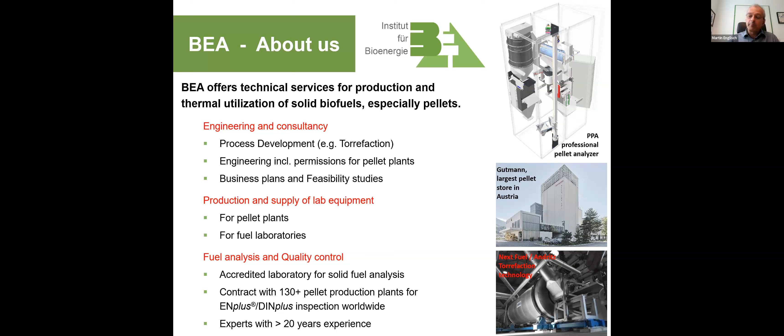You see on the right-hand side the enriched process for torrefaction, which we developed from the very beginning. We do very complex plannings - you see the largest pellet silo in Austria, which was an existing one that we rebuilt, and we also developed laboratory equipment. You can see here this pellet analyzer, which is actually sold worldwide - we've sold more than 400 tumblers to pellet plants worldwide, including overseas, from Japan to Chile, you will find our instruments.

So, enough advertisement, I'll just start with the topic. There are a couple of pellet plants in the world. I have an example of a pellet plant that was an interesting idea in Austria, starting with a high potential raw material and low competition. They used low quality hardwood, which is hardly used in Austria as a raw material. They started with a very innovative drying and production concept, reducing their energy use, so everything seemed to be really good, and they also introduced new machines.

But they made mistakes - they actually skipped the professional engineering. They thought they could do it themselves, and then they had very high downtimes and wrong product placement, and in the end, the plant failed.

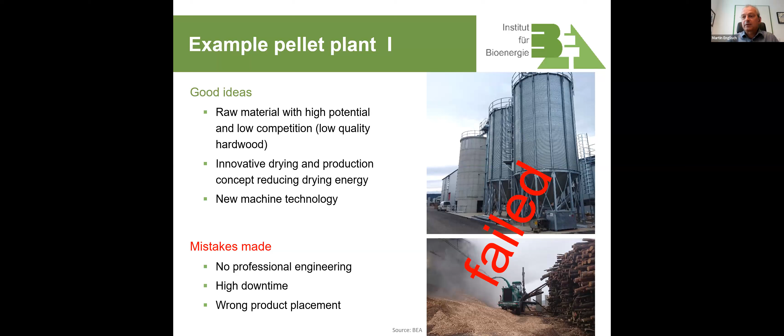Another example, two big ones. The largest plant in Italy doesn't exist for a long time. A huge plant in the US, huge quantity, using economy of scale - good idea. Placed in areas, one where all the sales are, the other in a port for easy export. But the problem was that the raw material sourcing and logistics was not properly planned, so they failed.

So even if you are innovative, you can fail in the pellet business. It needs an approach from the beginning. So from the business idea you have, the first thing you have to check is the raw material. Most important for a pellet plant is the raw material - it is the quantity, the quality, and the availability for a long time. Because when you build the pellet plant, it has to run for 10, better 20 years. So for that time, you need raw material available for the 10 or 20 years, and also available during the year. That's the first thing, raw material.

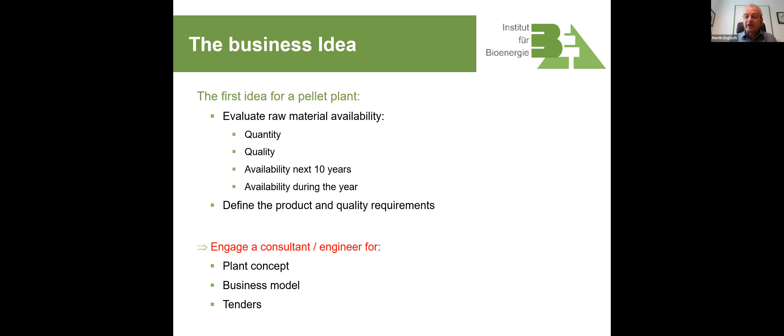The other thing is the product. When you have a certain raw material, you can only make certain pellets. If you have bad raw material, you cannot make good pellets. So you have the raw material, and you should define the product and the quality requirements you want to get for this product, the market. If you have these two things, that's actually enough - you can already engage a consultant or engineer to start with a plant concept, a business model, and later on with tenderings. I'll go through all these steps now in a little more detail.

The raw material - we start with the raw material. There are different options you can use. The classic pellet plant in Europe starts from a sawmill, or from the sawmill byproducts or wastes. It is sawdust, it can be wood chips, it can be offcuts, whatever. Depending on the quality of these residues, you can make A1 pellets or A2 class pellets. What is A1, A2, and B? This is a classification for the quality of wood pellets according to international standards.

Well, if you don't have a sawmill and sawmill residues, you can also use logs coming directly from the forest, given they are sustainable and cannot be used for sawmill or other business. They are good as a fuel. So you can make logs, you can make wood chips, but you can also produce pellets. Pellets have more or less the highest energy density, and are the only form you can also trade. So when you have a source for a lot of logs, but not a regional pellet market or fuel market, you can produce the pellets. That makes sense.

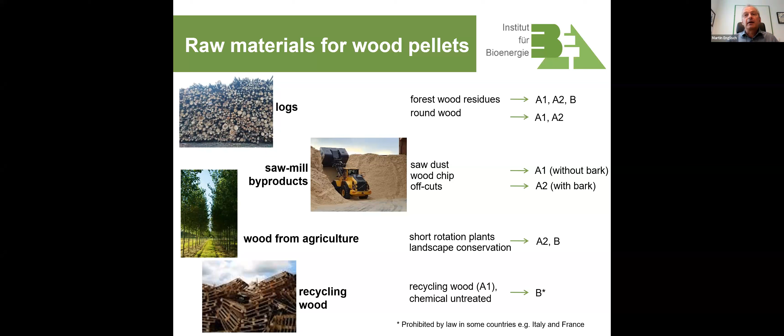Also, depending on the quality of the logs, you can make all kinds of qualities. You can use wood from agriculture - what's the difference? I mean, this is short rotation plants. They have a little bit of different chemical composition, and you have to check carefully what can be used for pellet production. And finally, you can use certain fractions of waste, recycled wood, which is clean, like pallets and others. I have customers and plants which actually work on these kinds of residues. It is the most difficult one, and the problem is that you can only make industrial pellets out of these raw materials.

So it's important to define the product - which market do you aim at? Currently we have two big markets, which are both 50%. One is the industrial market for power generation in Europe - about 50% of the pellets are used in these power plants as a substitute for coal, mainly in Northern Europe, like in UK, in Sweden, and other countries. The rest of the pellets are used for heat and hot water supply, in very small systems like stoves, but also in central heating systems, in commercial units, in a little bit bigger ones, with or without grid. So there are hundreds of different systems used in Europe.

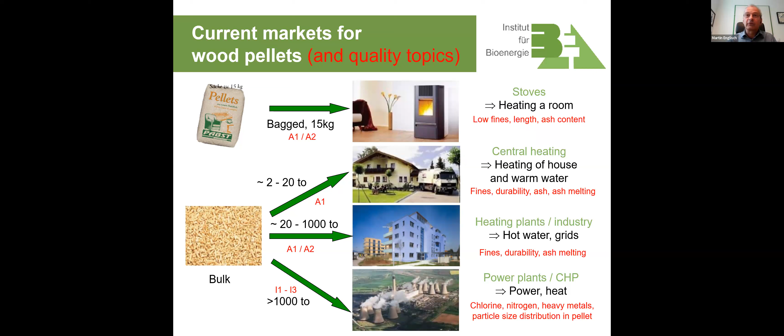Okay, now you have defined your raw material and you have defined your product. The next thing is, if you want to invest, you need to define a plant capacity. How many tons a year should be produced?

As I said before, based on the product requirements and the raw material available, you have to define the product storage size and the intended trade form. This, as I will show later, is a huge cost factor.

And you need a site where to build the plant. For this site, you need some frame conditions, especially whether infrastructure is available. For a pellet plant, you need a lot of power. So if you're somewhere in the forests and there is no power connection, you cannot build the pellet plant.

Or you can build a pellet plant, but it may be much more expensive. You also need water, road access, infrastructure, maybe rail, a port - all these things need to be addressed when you actually define the site.

So with this information, you go to the consultant, and the consultant should check the legal requirements because they are different in all countries. Especially in Central Europe, we have very high or very tough regulations concerning environmental aspects. So the permitting thing is a big issue.

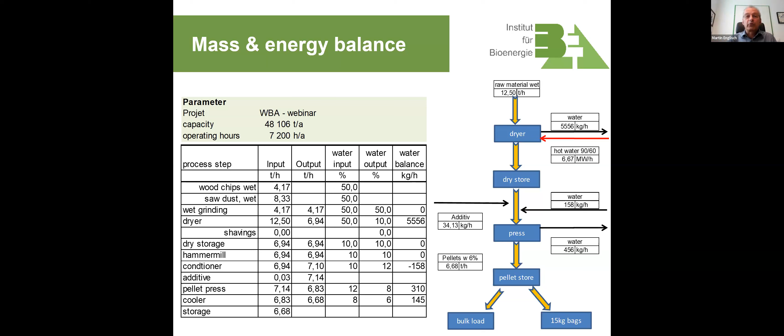Here is a block diagram, a simple one that shows how the main processes look like. So we start with chips and sawdust. The sawdust doesn't need any grinding, but the chips need grinding. They need wet grinding, and usually you have a sieve to get rid of contaminants.

Then you go to a dryer. In this case, we have here a belt dryer. We need warm water, hot water, to feed this belt dryer with energy. This can be derived from a CHP plant or from another boiler.

After the dryer, we can add dry shavings, and we go to a dry storage, which is a buffer between the dryer and the pellet mill. After the dry storage, we grind up the material even a little bit further. This is a dry hammer mill usually used.

After this dry hammer mill conditioning, we go to the pellet press, or two pellet presses, depending on how many we use. After the pellet presses, we have a product. In most cases, the product goes to a store. There are different options, and from the store to a truck loading station if you go with bulk, or to a bagging system, a packaging line where you do small bags for end customers.

So these are the main processes. And now you have to say, well, okay, main process is one thing, but there are different dryers on the market, many different concepts. There's different pellet mills on the market. So let's just give some examples of what you have to consider next.

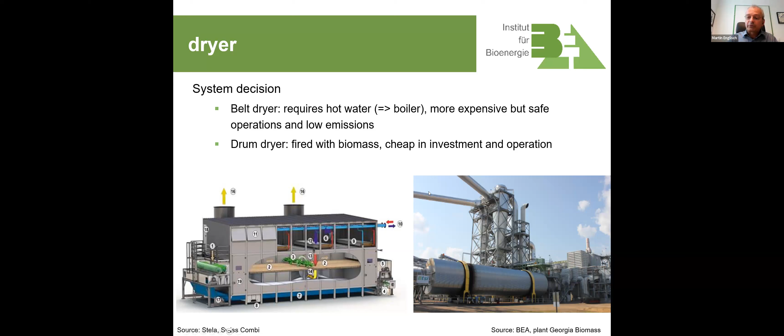Example dryer, other example the pellet press. We'll hear later on from Andritz. I don't have an Andritz press here, I have other ones, but that's not important. Important is the system decision.

Do you want to use a ring die press or do you want to use a flat die press? There are advantages for both.

In principle, in a pellet plant, the press is an important piece of equipment, but it's just one piece, and it's always important to keep in mind that the whole plant has to work. The pellet press is usually not the limiting factor, not the big problem. But you have to decide whether to use one big press, or two or three smaller presses for a certain pellet plant. This decision has to take into account the availability of raw material and safety. If you have just one press and that fails, then the whole plant is not running. All these things have to be taken into consideration.

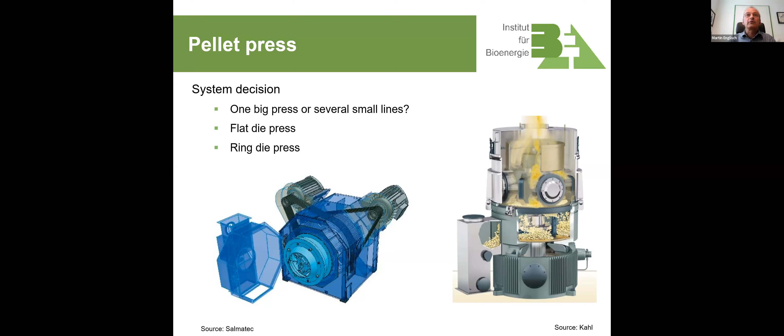Also, these machines are offered on the market for very little money. We have mobile systems - they are nice, but same issue: very difficult to handle, high costs in operation. You have to be very careful. They are promising because they say just two trucks and the system will produce pellets for you, low investment, all fine. But in general, be very careful, because it's still a high investment, and if you don't produce the pellets, it will not work.

Pellet storage is again a system decision. There are two big possibilities: one is flat storage, the other is silo storage. In many plants worldwide there is no storage at all, so it's directly packed into small bags, and the bags are stored like you see in this picture.

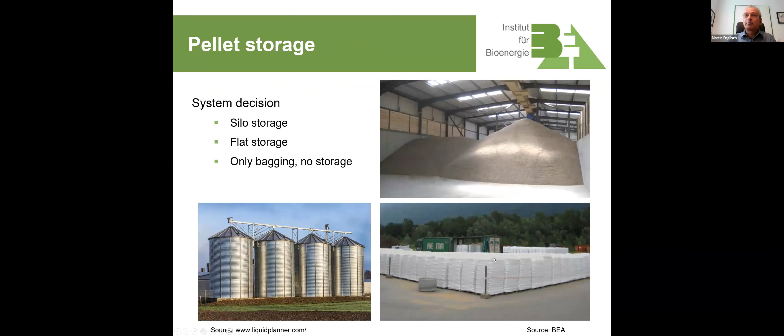So now you've decided all these things, then you draw a process flow diagram where you define the process a little bit better - that is engineering. Just as an investor, buying without having a flow diagram will cause troubles. A lot of components won't fit, you'll miss a lot of components at the end, and finally you do re-engineering and refurbishment from the time you start the pellet plant. So you need a real, complete engineering of the plant.

Having this done, we make a business plan. So how do you make a business plan? You need expected costs for the raw material - this is what the investor must provide. You need the expected price for the product, depending on the market you want to go to, and depending also on the transport costs. You need to know the cost for power, water, other things, and you need to know your financial conditions, the loan, the capital costs you will get from your local banks.

This is what you provide to the consultant, and the consultant should then create a layout and estimate the investment costs. Investment for the technical equipment, installation and commissioning is one thing, and investment for the site, construction and infrastructure is another thing. Usually you need two consultants, one for the technical equipment and one for the construction. The consultant has to estimate the operating costs - you can calculate this very well in advance. And finally, you make a business plan.

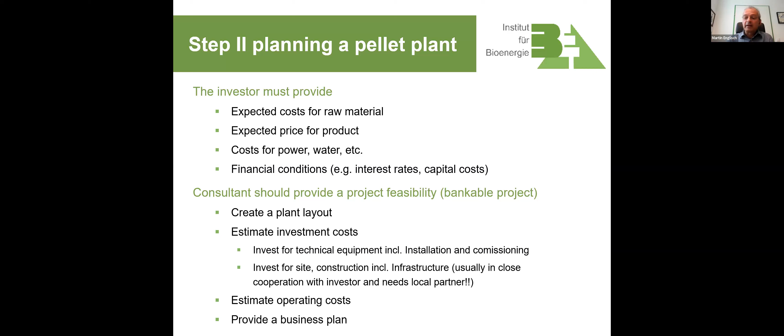So let's go through these steps briefly. I have here an artificial case of one plant we're just building at the moment. You see there is a big wood processing industry already existing, and here in this red circle we see the pellet plant which we designed together with a partner, Teccon Engineering. This is a big plant with 150,000 tons.

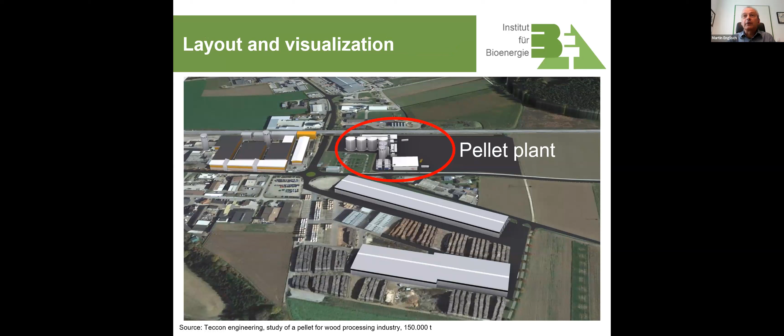We just look a little bit more at the layout. Here you see the raw material reception area with a walking floor, with the material preparation. We have a pellet dryer. We have a dry material storage site. Here is the pellet plant. Here are storage silos, here is a truck loading station, and here is a bagging station. So this is a full plant like we see very often in Europe.

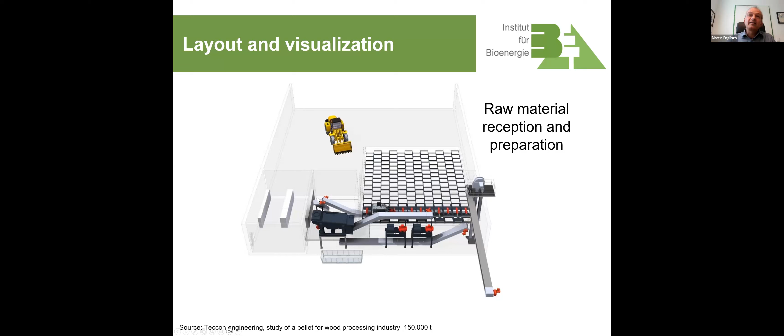If we want to go a little bit more in detail, this is how a 3D planning can look like. Here you see the raw material section with redundant wet mills and a sieve to get out the oversizes, electric chambers, and conveyors. Another part is the pelleting section with 3 big presses, the conditioners, and technical equipment. And this is a detail of the truck loading station, shown in double because it's a big plant and we have 2 truck loading stations, including suction systems and conveying systems.

So this is what you produce, the layout for the customer. Then you actually estimate all the costs. This is an example for this plant. Here is the example for a 50, not for the one you've seen before, but for the one I've shown at the beginning where we did the mass and energy balance.

So I calculated the approximate costs here for an Austrian case with about 14 million euros of investment. You see construction is something, wet material conveying, drying, dryer, pelleting, and the truck loading, the pellet storage and conveying. You need cabling and control systems, installation, commissioning. You need costs for planning and permitting, and of course always some unexpected costs. So that ends up in 14 million euros for such a plant, which would be a price for this example.

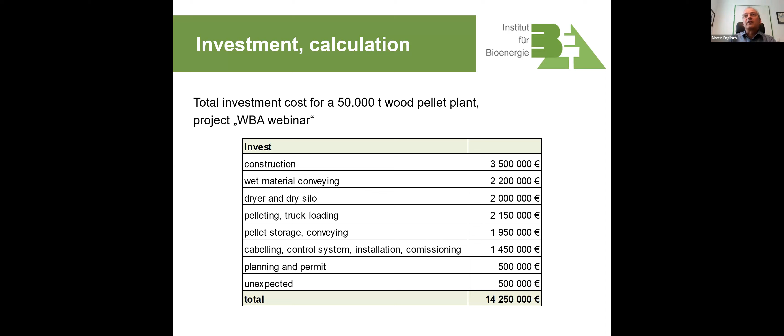For this example, you can also calculate the operating costs. In this case, we calculate spare parts, which is dies, rollers, which is the belt for the belt dryer, and other things. We need consumables, water for conditioning. We need oil for greasing. We need the additive, which in this case is starch. We need the heat for the dryer, which we buy from a CHP plant nearby. We need power, we need staff, people working in the plant, and we have a rent for the site. So the total operating costs add up to about 3 million in this case.

And having done this, we can actually create a business model. In this case, we have sawdust, wet sawdust and wood chips we use as a source with different prices. We actually sell our product in this case in 60% bulk and 40% in 15 kilogram bags. And we estimate a sales price of 290 euros ex-works for the bulk and 308 for the bag pellets. We estimate 7,200 working hours, and as shown at the beginning, when we work for 7,200 hours, we will end up with about 48,000 tons.

We have some financial partners. We have 20% equity with 15%. Cost of debt is very low. At the moment it will increase, which makes it a little bit more difficult.

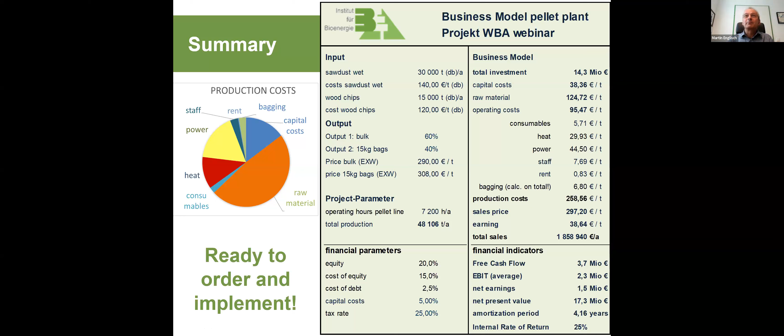Of course, there is much more. Usually it takes about 1 to 2 years to plan such a pellet plant. I've done it now in 20 minutes. So this is just a brief overview. Please keep this in mind.

Thank you very much, Martin. That was a wonderful overview and gives our audience a feeling of what we're talking about. If we're talking about a pellet plant in Europe under European circumstances, I will ask also the pellet machinery manufacturers how that is in other contexts, because that may be different. And there are also quite widely differing costs in pellet plants, so how they see that.

But before we go to the next presenters, Martin, there are 2 questions from the audience I would like to put to you. The first one was asking whether transport is a limiting factor, the energy demand for transport, how relevant is it, and will it limit the possibility to sell pellets? So maybe you can say a few words about the role of transport for pellets. And then the second question is, what about other raw materials? You were only talking about wood pellets because right now that is the main thing, but it seems like in the future other raw materials will play maybe an even more important role than wood. So what other raw materials have you seen? You have a lab, you're testing pellets. What kind of pellets have you seen in your laboratory? So these are the questions for you, Martin.

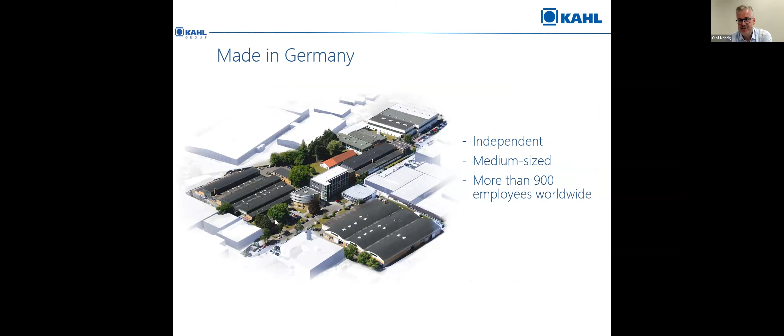My topic today is the global trend towards high efficiency wood and biomass pelleting plants. Amandus Kahl has a global approach in this industry. We supply complete plants, and we supply single machines for wood pelleting, agriculture residue pelleting, and many other raw materials which have a heating value. Amandus Kahl is a made in Germany company, from Reinbek, close to Hamburg in the north of Germany. We are a family-owned business, and the whole Kahl Group has more than 900 employees worldwide. We are one of these typical German mid-sized, technology-leading companies in the industry.

I thought about what to present today and what is important for this audience, since there's a variety of speakers addressing different things here. Amandus Kahl today, maybe you don't know this, we are the market leader in high performance pellet mills larger than 500 kW. Basically we are the market leader above 400 kW, but I want to go now into the 500 region. We have here this Kahl model 65-1500 with 630 kW, 10 to 12 tons capacity, and more than 100 machines built already.

That's a significant number when you calculate these whole capacities together. Mr. Englisch in his presentation said you have to compare ring die or flat die, and what are the advantages. I think it's really worth taking a look into this. What are the advantages in the technology? That's what I can only ask anybody who wants to build a pelleting plant for biomass or wood: take a close look, what is really required, what are your targets, and what are the important factors in OPEX afterwards? There are significant differences, not only in the pellet mill.

First of all, we also do another pellet mill now, we make it a little bit bigger. We go with 800 kW, 13 to 15 ton basic capacity. This is all built on the substantial numbers of 400 and 630 kW machines in the market. We will address more and more the big plants, although we also have pellet mills with smaller capacities, 132 kW, 200, 250 kW. This is all available, and you may see the advantage of the smaller pellet mill when I continue with my presentation here.

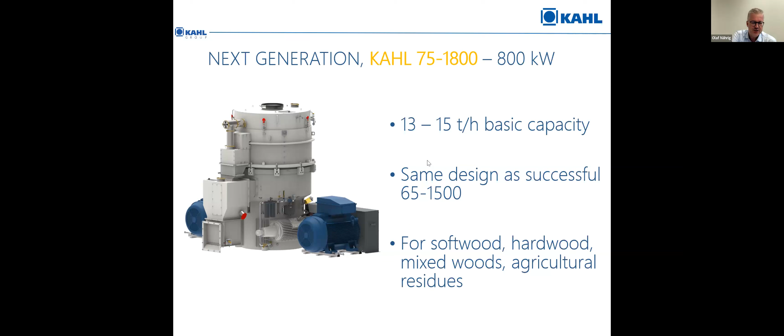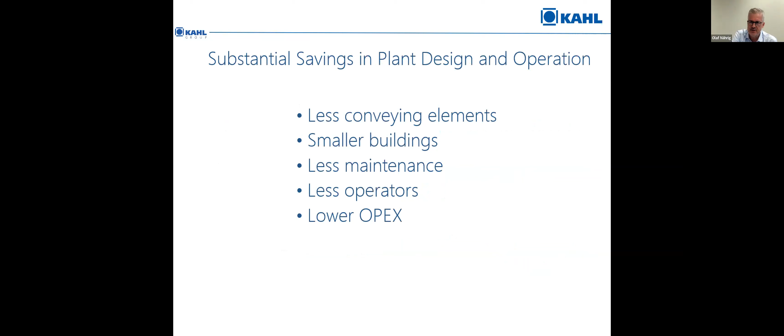But now in the big pelleting plants, what are the advantages? There are substantial savings in plant design and operation when you use the larger equipment. You have less conveying elements, smaller buildings, less maintenance, less operators, and of course lower OPEX in the end. When one pellet mill does the job of two pellet mills, it has an advantage in the design and in the OPEX.

Mr. Englisch also mentioned different qualities are required in the market, let's take a closer look at this. The main market today is the industrial pellet application. I2, I3 industrial pellets are produced, which go into co-firing in power plants, ground and blown into the power plant and burned together with coal powder. But a very substantial market is home heating, where we need durable, high quality pellets but without particle size requirements. The industrial pellets need a particle size defined in the standard; for home heating it's not defined, and that gives us a lot of opportunities in the plant design.

Then we have gasification pellets, this is more a business here in Germany and Japan. These people want high quality standards, basically based on EN Plus A1 standard, but they also look into things like clinker generation in the gasifier, which is a substantial point. And then a very strong trend now in Southeast Asia is torrefaction after pelleting.

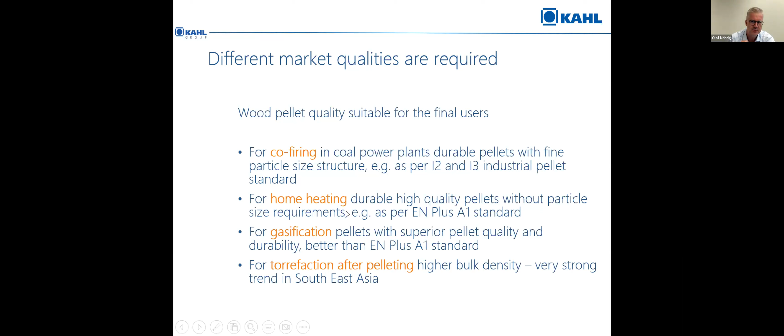But let's take a look now at the home heating market - more than 500, 600,000 tons of pellets without I2 standard classification supplied to Japan today, which means they don't need a dry hammer mill. Same as home heating, you don't need a dry hammer mill. In many diagrams, I always see dry hammer mills because everybody thinks you need one in a wood pelleting plant. No, it's not required. You need it when you want to do I2, I1 or I3 pellets. But for other pellets, it's not a must to have a dry hammer mill.

And a dry hammer mill causes dust explosion issues, has high energy consumption to grind something down, and has additional CapEx and OpEx. So now take a look, only in this topic here, on the energy efficiency if you just want pellets without a particle size requirement.

Production of pellets without particle size requirements, like EN+, A1 or others - so no particle size requirements. That means we have, for example, a wood chip and we want to do a pellet. With our research and work in recent years, we have developed processes where you can do grinding of the wood chips and pelletizing them with just an energy input of 75 to 80 kilowatt hours per ton. And if you use steam, it will be even lower because you can skip the dry hammer mill here.

And that's essential, and that's, I think, to be understood when you want to make your business model for a plant. What is your final market? Is it EN+ pellet? You don't need particle sizes, you don't need a hammer mill, when you use a Kahl flat die pellet mill, of course.

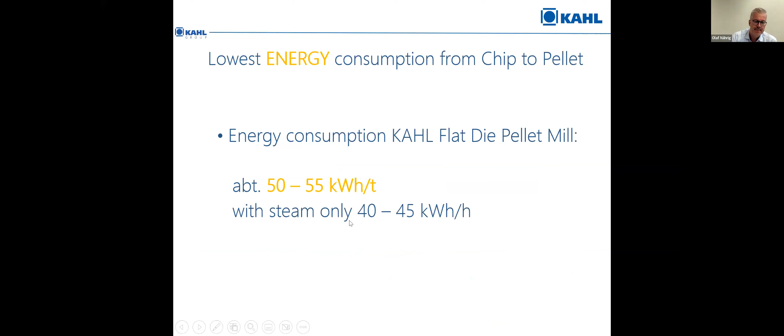Energy consumption of a Kahl flat die pellet mill is about 50 to 55 kilowatt hours per ton - with steam even lower. And now, what about grinding? If we don't have particle size requirements, we don't need a hammer mill and we can take them out, or we just simply don't install them from the beginning.

Maybe you leave space for a later installation - that's also okay if you want to have later a market where you have particle size requirements. But a hammer mill consumes 25 to 35 kWh per ton of pellets produced, and that's a substantial amount where we have to take a look into it, because we saw the electricity bill in Mr. Englisch's presentation, and we see rising energy costs. So why do we need to grind something which is suitable for pelleting already?

And really the answer here is we take the Kahl pan grinder mill for the wood chips, grind them down on an energy consumption of about 15 kilowatt hours per ton wet. When I calculate these on the dry pellet based moisture, then it's about 24 to 26 kilowatt hours per ton. And as you can see, the material here on the lower side, on the bottom side, this you can pelletize with a flat die pellet mill.

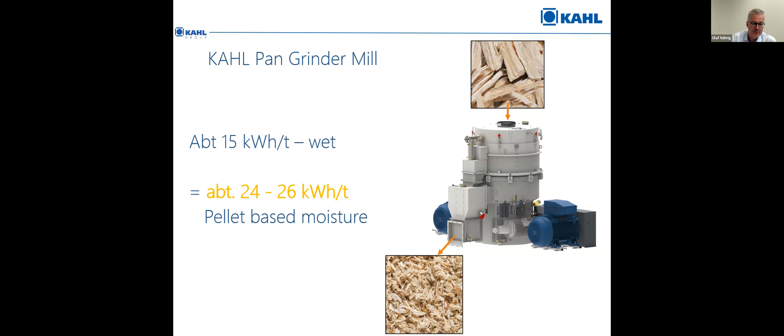No further grinding with a dry hammer mill required, and you make a very good pellet. You perform all requirements for bulk density, pellet durability - it's all performed very well. So this brings really the lowest energy consumption from chip to pellet.

Only 74 to 81, or 75 to 80 in this range. And this is what we see with many players - this is just the energy consumption of a pellet mill in many cases. Here you have it including the grinding. So that's a very significant point one has to take a look into when designing a pelleting plant.

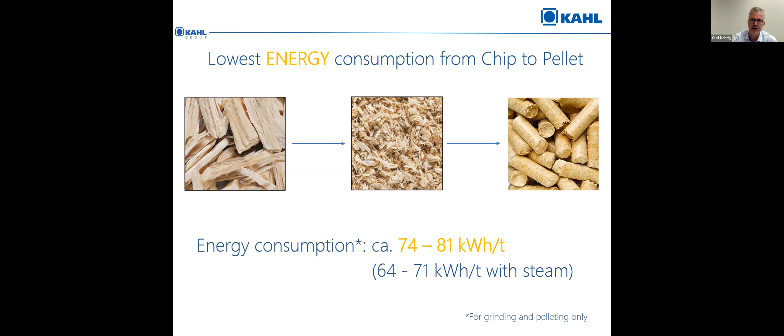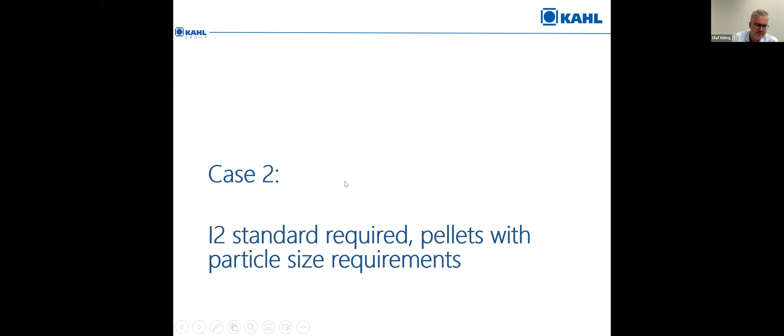So now case study number two. I have an industry standard where I have particle size requirements - pellets with particle size requirements, 95% smaller than 2 millimeters or something. That's something we have to consider and address. But when I put a wood chip into a KAHL Pan Grinder Mill, for example, I already have 40% of the material qualified for the I2 pellet standard. So do I need to grind this again in a dry hammer mill?

Of course not, I don't need to do that again. So how to do it? Screening off the already fine enough material after the dryer and bypassing the dry hammer mill. This saves 40% on the complete grinding energy. So the energy drops from 25-35 down to the dry grinding at 15-20, with less machines, less stress, less work, and fewer wear parts on the hammer mills.

I know hammer mills are always an issue in my markets in Asia. People don't like hammer mills because of dust explosion, filter cleaning, fire risk - so many reasons why people don't like hammer mills in the plant. That's where we, as an industry supplier, need to find answers. And here we have very good answers - this is a very energy efficient system to make pellets. You can calculate yourself with the energy costs in your country what this means to you.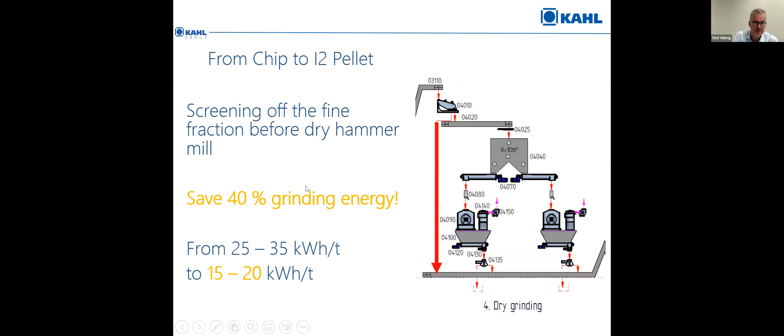Now, coming to one thing - you also want to know what's going on with pellet mills, and how to increase operation reliability. There are also too many things not really addressed - people always say, oh, you need this kind of pellet mill and you need this, but that's not the answer. We need technical points where we make the whole process more efficient in the pelleting process. We saw grinding has a lot of potential, but also in the pellet mill there's a lot, because the issue in the pellet mill is always gap control.

The better you can control the gap, the more efficient your pellet mill runs. What does it mean? Once the gap is set, as soon as you start pelleting, the gap is lost. What happens is there's wear and tear on the dies and the rollers, so the roller diameter starts to shrink by wear and tear, and the die is reduced in thickness. The result is a widening gap, which causes lower capacity on the pellet mill, higher energy inputs, and more wear and tear - and in the end, higher OPEX.

How do we avoid that? We want to keep this gap as stable as possible for the longest time, so that we don't lose the gap already after half a day. Otherwise we start having a deteriorating process where energy consumption goes higher, capacity goes down, pellet quality comes down, and wear costs increase.

So we have recently introduced, for wood pelleting, automatic gap control systems - a self-taring system with automatic zero calibration during operation. You don't need to stop the machine anymore to reset the roller gap. For the ones who operate pellet mills here in the audience, they know what I'm talking about. Maybe for some people it's a very abstract topic, but for the people who run pellet mills, this is a very interesting feature for making their systems more reliable, more energy efficient, and running at higher capacities for longer.

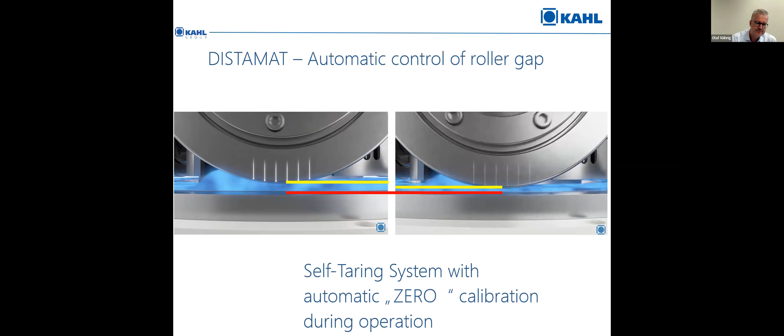Now, this is PLC controlled. We've done this kind of gap control for more than 30 years in other industries, but now we've also brought it to the wood pellet industry. This increases the uptime of the pellet mills essentially - we already have figures of up to 150 hours in North America, and 500 hours in Eastern Europe without resetting. With the gap control system, this can be increased by 2 to 3 times.

This makes it very interesting for people in the industry to select Kahl equipment, because Amandus Kahl is the only maker of real industrial flat die pellet mills, whereas everybody else makes ring dies. We are very successful here in the industry because our pellet mills have very significant advantages. I know it's a little bit of Kahl promotion here, talking about the advantages, but seeing also the advantages in the grinding system, it really makes sense to look into.

Kahl is a market leader in highest performance pellet mills in the industry. This technology from Kahl offers the highest energy saving potential in wood pelleting, going from wood chip to pellet with one grinding step only. Production of EN plus pellets and post-torrefaction pellets without a hammer mill, using only the Kahl pan grinder mill, with automatic gap control between rollers and die for extended operation time, higher availability, lower energy consumption, and lower spare and wear parts consumption. These are all the things we have to look at.

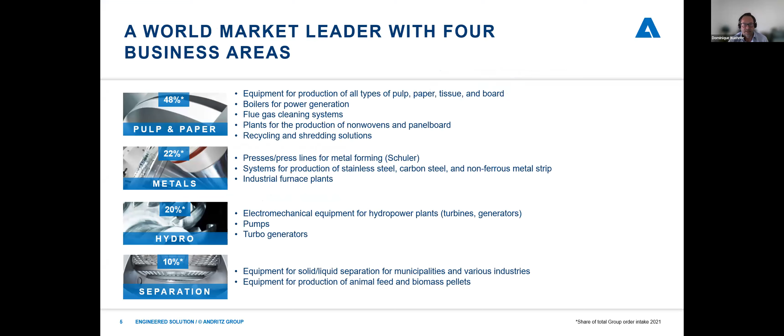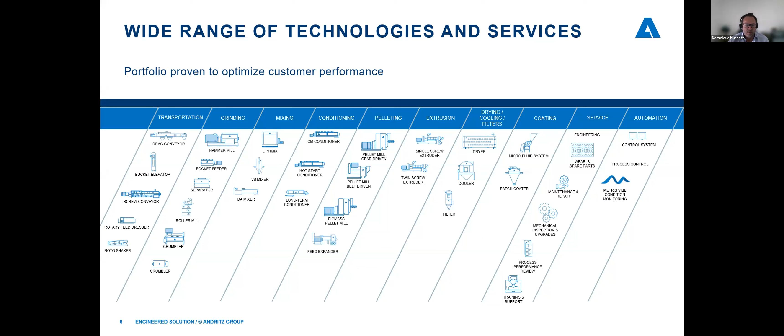But at the beginning, please allow me to quickly introduce Andritz a little bit. Andritz is a large Austrian company with 30,000 people worldwide, so we have a good network throughout the world. We are set up in 4 different divisions, with the biggest being pulp and paper, so you can see we have a lot of experience dealing with biomass and fibers. We at Feed and Biofuel are part of the separation division, and we have a complete portfolio. We have a lot of the key machines required in biomass pelleting, but we also work in animal feed, aqua feed, and pet food. We focus not only on individual equipment, but also on complete plant solutions, starting from the raw material intake all the way to offload, including our key equipment. We have a global presence, so wherever you are in the world, there is always an Andritz office nearby. We are not only supplying equipment, but also focusing on supporting you with wear and tear parts. Andritz itself is the largest supplier of dies in the market, and we supply dies for our own equipment, but also for other machines, including flat dies.

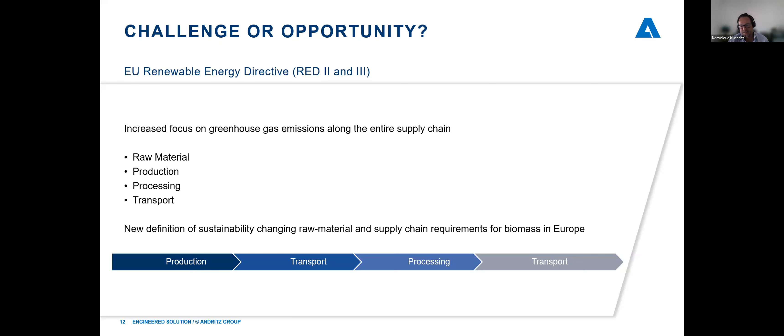Coming to where we see the future of biomass to energy, it's important to understand regulations and where the market is going. As already introduced earlier, the environment is changing. There is some uncertainty, and raw materials are getting questions, but we're also looking at the whole production process and transport, which is deciding where the market and opportunities are going. It's important that we look at complete solutions, and real wood pellets remain the dominant raw material. We have to look at situations where wood as raw material is changing, the wood mix is changing, and where we get the wood from might be changing. Maybe we start designing for sawdust, but then as time goes on, we move into wood chips, and we need flexibility. It's important that we choose equipment flexible enough, not just for now, but also for the future. There are various raw materials out there. The focus is on woody biomass at the moment, but we're looking more and more into agri-residues depending on where you are in the world, also energy crops and plantation crops.

Each of them has a different setup, a different request of processing. So if you are planning for the future and looking ahead, and you have your raw materials secured for the next couple of years, please keep in mind that regulations change, raw material sources change, and it's important that you allow for the necessary flexibility.

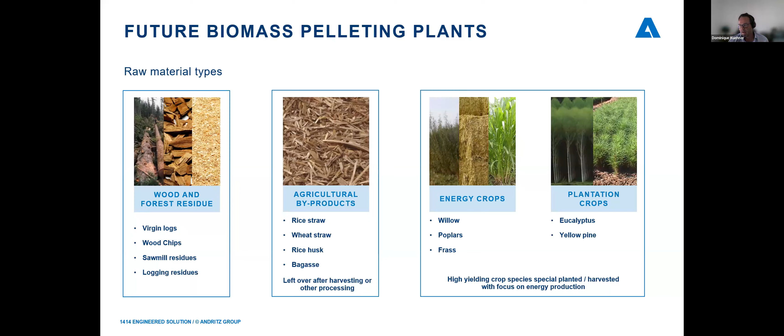From us, we are looking at various different plant solutions for processing, from logs to pellets, but also from chips to pellets, sawdust to pellets. We're looking at agri residue and other fibers. And always, even if we just supply you the key equipment or the stacks, we are looking to make sure we understand your upstream process, so we can select the right equipment and give you the necessary flexibility for the future.

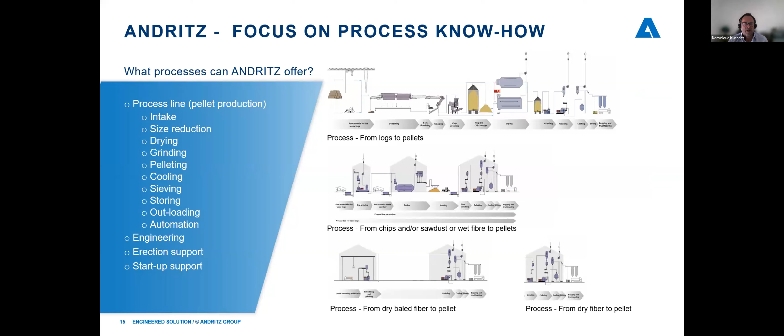But now coming to woody biomass, which is probably a little bit of a topic at the moment. What we are looking at is we focus on safety and serviceability.

Operating a wood biomass pelleting plant, certain risk has already been mentioned. By designing a plant and designing the equipment, it's important that you have safety in mind and you look at the complete process. It's important that you look at reliability, sturdiness of the equipment within the lifetime of the parts, and design your key equipment accordingly.

But the CapEx is not only just in the single machine. CapEx and OpEx need to be looked at as a complete plant, and the individual steps as well as the plant solution need to be designed accordingly.

But at the end of the day, you have to produce the pellet quality requested in the market. It can be domestic, it can be industrial, but again, it's necessary to have the flexibility to produce the pellets requested by your customers.

So looking at the overall process, normally, if we are able to start with chips or actually with logs, how we chip, how we treat the raw material coming in. At Andritz, the normal process has a chipping and a wet grinding solution. We are proud that we have supplied Georgia Biomass, the largest wood pelleting plant in the world, as a total solution, and we have chosen the right technology for that application.

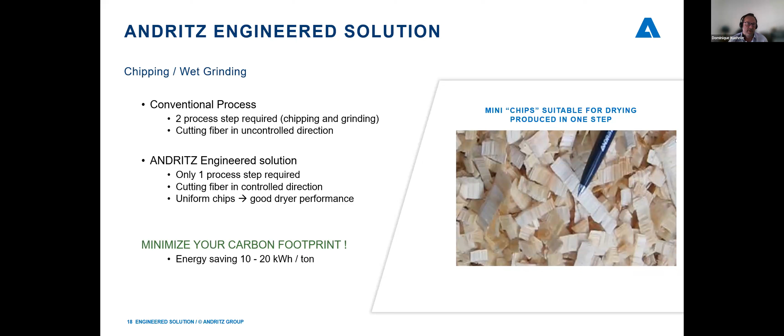Going further down the line, the drying and the dry grinding—having the right chips coming in, having a homogeneous moisture, a homogeneous chip size—then helps you in the downstream processing. It saves you energy in the dry grinding. It gives you the right pellet quality, the raw material quality to go into your pelleting machine, and your pelleting machine can then focus on densifying the material rather than grinding it down as well, in a machine which is not ideally designed for it.

Going further, we have the pelleting technology where, depending on where you are in the world, sometimes steam is used, sometimes it's not. We have seen that if the raw material entering the pellet mill is of the right temperature, the pelleting process works better. It doesn't spend electrical energy to heat up the material. Using steam prepares the raw material and reduces the overall energy consumption.

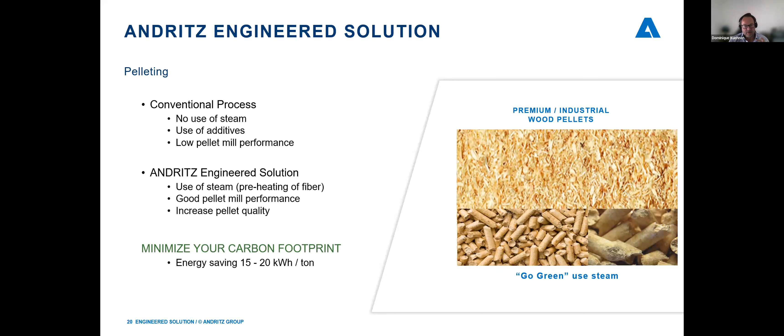We also focus on optimizing our pelleting process, which gives us a total saving of about 15 to 20 kilowatt hours per ton—we'll talk a little more about the pelleting process later. So altogether, what we see is that if you look further than just the individual equipment, if you look at the overall process itself, there are various opportunities which go hand in hand, which can help you develop a more energy efficient plant.

And we saw the electricity cost earlier, which is a big part of the cost of a pelleting plant. But I think it's important that we're not only looking at cost, we are producing a sustainable, renewable fuel. And we also need to keep in mind that producing the pellets, producing the fuel which we want to sell as a sustainable fuel, we also need to look at our CO2 footprint, and we need to make sure that we are optimizing our whole process in terms of efficiency to decrease the electricity consumption per ton, and therefore reducing the overall CO2 emissions related to biomass.

We at Andritz have demonstrated the capability of designing this plant. Waycross, or the Georgia Biomass, built 11 years ago, is currently outperforming the nameplate by 15%. With an installation which is already running for 10 years, I think that speaks for itself. Our equipment is designed for the purpose and gives the necessary reliability to deliver the performance over time.

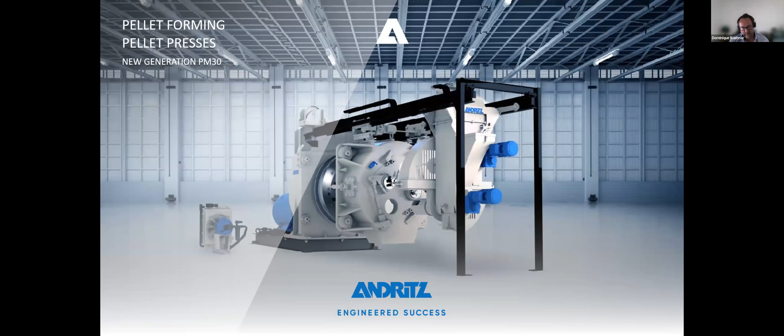At the end, I would like to take the opportunity to introduce our new generation PM30. It is a mid-range pellet mill in the 5 to 6 ton area, which we believe is the most common size to be used in the market. If you look at the size of the average pellet plant, especially, maybe there are a few large pellet plants being in planning, but a lot of the pellet capacities are not going to be 200,000, 300,000, 400,000 tons a year. So we have focused our latest development on the mid-range PM30.

We focused on an increased capacity, improved serviceability and safety. So the people working on the machine are in our focus, increased reliability and uptime. We have changed several features of our system to reduce wear and tear and reduce the mechanical stress of a biomass pelleting plant, which together will give us reduced maintenance times and additional reduced operation cost.

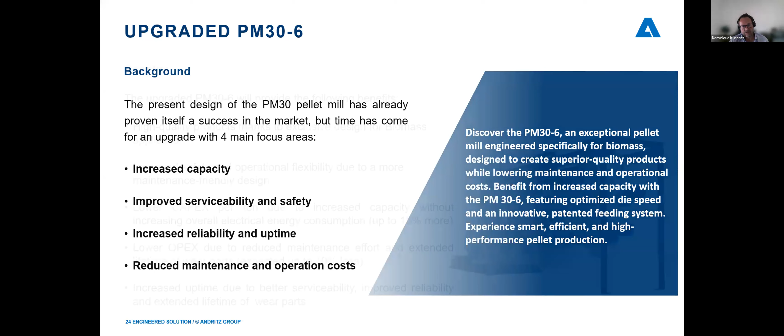We are, of course, still focusing on producing high quality pellets, but we already have 4 machines being delivered in the next couple of months, and we see for this new development a saving in capex of up to 15% and a saving in opex of up to 10%. It's a proven machine, it's a proven design, it's already been in the market for 45 years. It's now the 6th revision, meeting the new demands of the industry going forward.

And with that, I'm completing my presentation, saving a bit of time, trying to catch up as well. So if you have questions, I believe they will be handled afterwards.

Thank you very much, Dominique. That was also very, very interesting to see how you have developed a system of supplying really entire plants.

I would like to ask both you and Olaf for a short statement on the following question. There are very significant differences in the price of pelletizing machines or different machineries in the market. Some pieces are offered at way lower costs than you are offering them. How would you explain to a customer who is new, who wants to do, let's say, a medium or even small scale pellet mill in Africa? How would you explain to him why he should use expensive equipment? And be specific, because just saying it's a better quality is not enough.

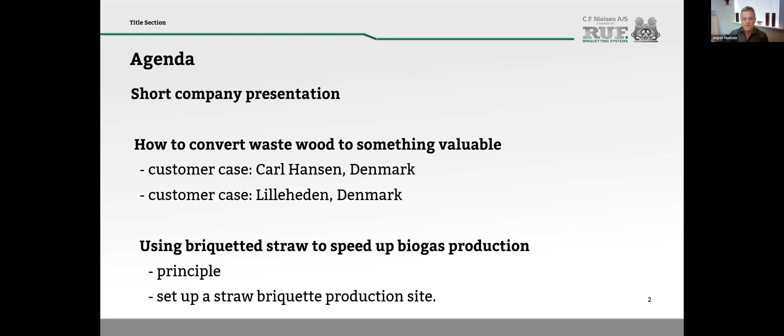The theme of this was feedstock conversion to pellets and briquettes, and my agenda is to give you a short presentation of the company, how to convert waste wood to something valuable, with two cases from Denmark we have made this year. And then lastly, a little bit not a wood project, but we're getting straw into some valuable feedstock to be biogas.

Just a short timeline of the company - we are very old, we have been here since 1889, so I think we are, I don't know if we're older than both Andritz and Kahl, but anyway, we've been around more than 130 years and have made briquetting machines for at least the last 80 years.

A lot of things have happened during these many years, but the major thing happened in 2018, where a German company called RUF, who make hydraulic briquetting presses, bought us. Since then we have been part of their company, and I started in 2020 almost.

We manufacture the major part in-house, meaning all the machine parts, and also a lot of the welded parts is done inside our factory. We do that because we need a certain structure of the product, and also a certain level of quality which we can control in-house, and that's something we've done since day one.

Of course, we could also have a quick delivery when we produce everything in-house, very important. We also have an R&D department that makes specialized projects, and I think 95% of what we do is customized units. We don't sell a lot off the shelf. The major part is done together with the customer.

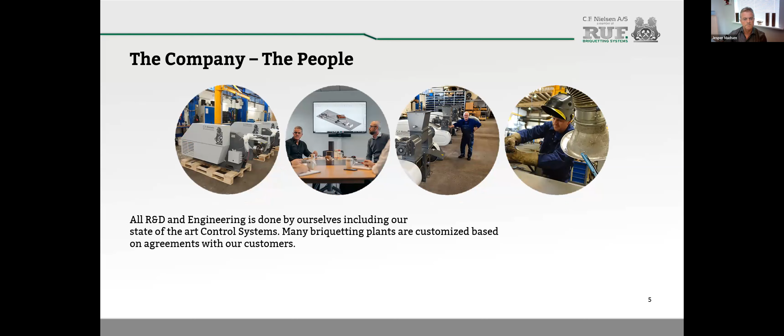As said, we don't do pellets, but do this kind of briquette. You can see it's a lot of different shapes, sizes, colors, and coming from all kinds of material.

What process or what material do we process? Of course, wood, softwood and hardwood, agriculture, straw, rice husk, coffee husk, bagasse, and other stuff like paper, MDF, foam, RDF, and a lot of other things which I will not bring here.

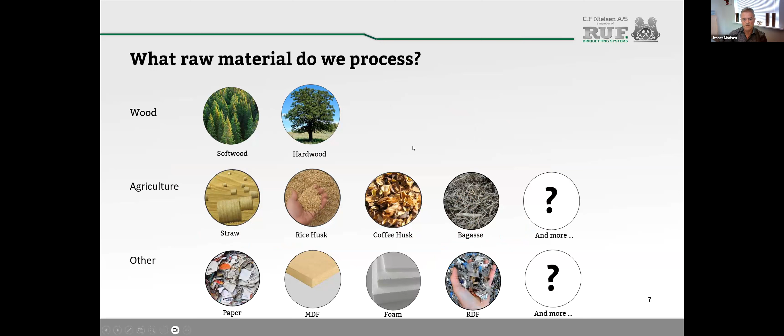We have 3 different kinds of processing. At CF Nielsen we do this mechanical press from 40 millimeter up to 120 millimeter, 200 to 3.5 ton per hour, and need, as the other guys, a certain maximum humidity in the product, max 16 for industrial and 12 for consumer.

Our mother company in Germany, they make this hydraulic press. I think you are familiar with this square briquette. They have smaller volumes from 30 to 1500, 1.5 ton per hour, and have the same requirement about moisture content as we do.

And then the last product is also something we have made now for the last 5 years. We call it Shimada press and extrusion press, that actually can make very high density briquettes up to 1.4. These are made mainly for, for instance, the pizza market.

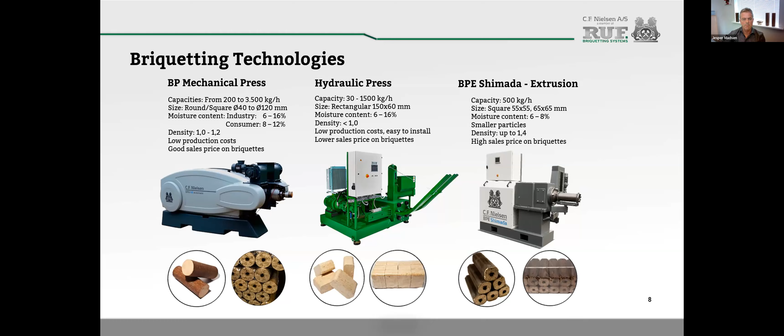The mechanical press we produce in Denmark is in these sizes, again, from about 200 kilo per hour up to 3.5 ton, depending on raw material, density up to 1.2 ton per cubic, and it's like an eccentric press just laying down.

I go only into the industrial part of our sales. We have been making consumer products more or less since day one, and now we are facing that the industrial side is going to be bigger and bigger.

This is a typical industrial site where we get the raw material into our silo, have two presses that actually feed up to 4 containers into a cooling line. This can make, as said earlier, up to 120 millimeter in diameter and density from 0.9 to 1.2.

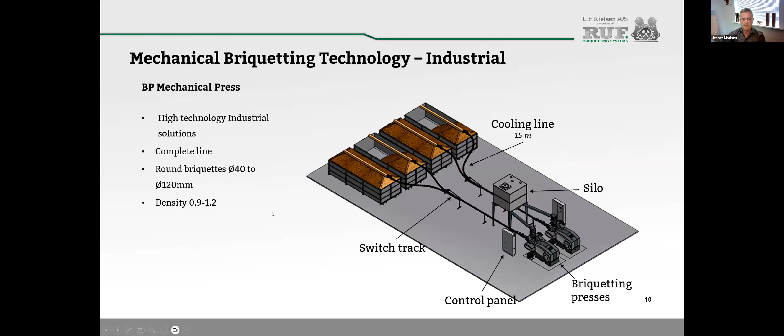Shortened briquettes is important for a lot of customers to make them fit into the boiler system. A simpler way of doing it is simply by weight. When you enter the cooler line or go out of the cooling line, it breaks off. A mechanical breaker could also be installed so you can cut them into short lengths.

You could also use a puck maker that could make pucks from 10 to 50 millimeter, or a divider system that could go a little bit higher, up to 75 millimeter. The briquette could be handled in different ways, as said earlier, into a container or 2 containers. Could be simply placed on a storage place or into a big bag system, which we also produce.

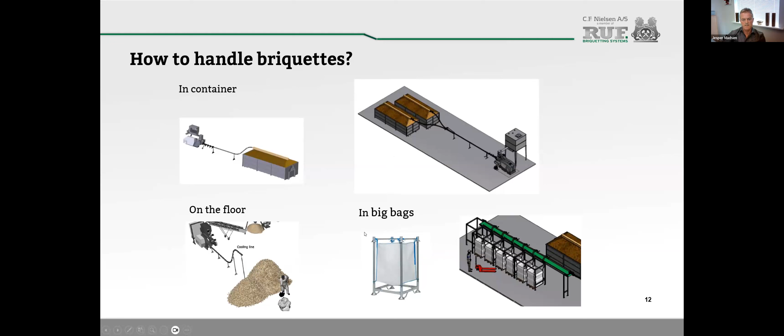I just show you 2 samples from Denmark, which we have had during the last 1 year. Maybe you know this product, a very famous manufacturer of these chairs in Denmark called Carl Hansen & Søn, and the chair is called the Y chair because of the shape of this back. It's a very, very popular one and a very expensive one. We made a large project with them this spring, and I have a video that I hope will work.

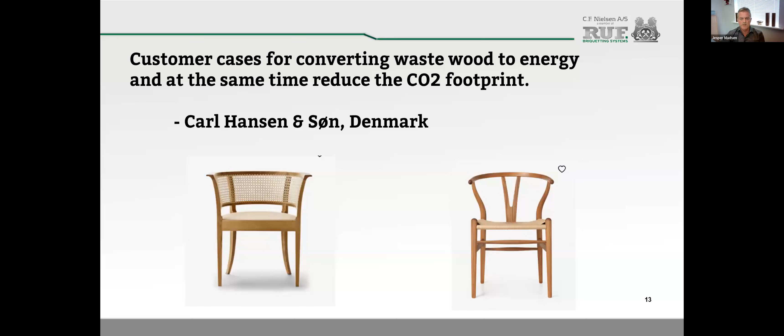Christian, it's working, right?

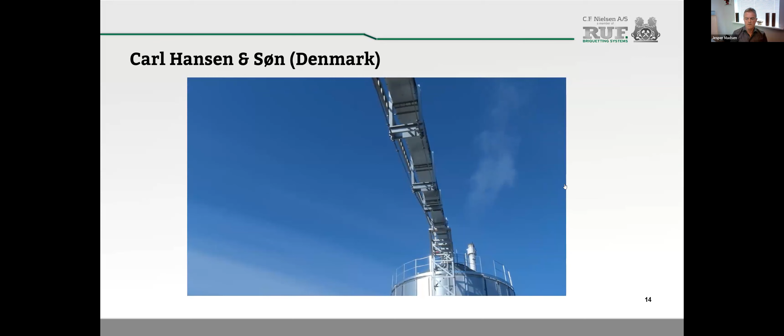A short comment: this company produces these chairs year round. Of course, in the summertime there's not a lot of need for heating because the shavings and sawdust they have is being used to feed a boiler for themselves and also the local community for district heating. So they had a lot of trucks going out from April to November with shavings, which they sold for almost nothing. But what they do now during this period, they actually make briquettes.

And they store the briquettes, which could be used in the winter time, and then they can supply themselves and also a larger amount of houses in the local city, which especially right now with the prices of gas that went up last year, has been very popular.

So this was a good case, and I have another one from a company called Lilleheden, also a Danish one. I think you might have seen this big glulam beam for larger house construction. This is from a sports hall, and this is from an airport in Denmark.

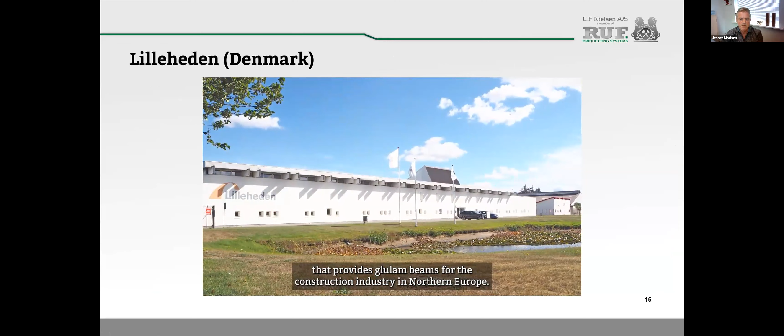There was just one problem. The supply of heat was out of sync with the demand. The company had way too much wooden fuel in the summer and too little in the winter. And as the loose wood residues were difficult to store for later use, they had to sell their excess residues in the summer and buy supplementary forest wood chips in the winter. The company had to find a better solution.

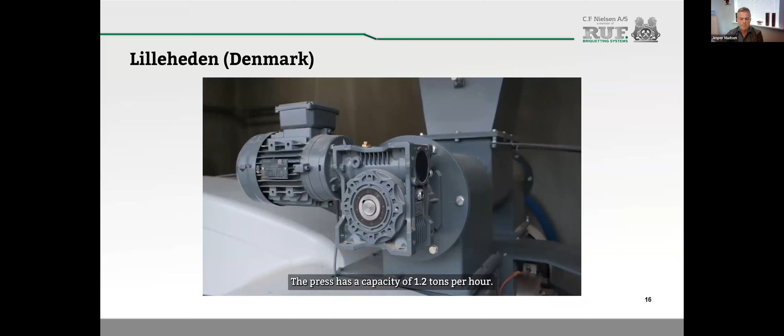The answer was a large on-premise press from C.F. Nielsen that turns wood residues into storable briquettes. The press has a capacity of 1.2 tonnes per hour. The raw materials used for the briquettes are wood shavings and offcuts from the glulam beam production.

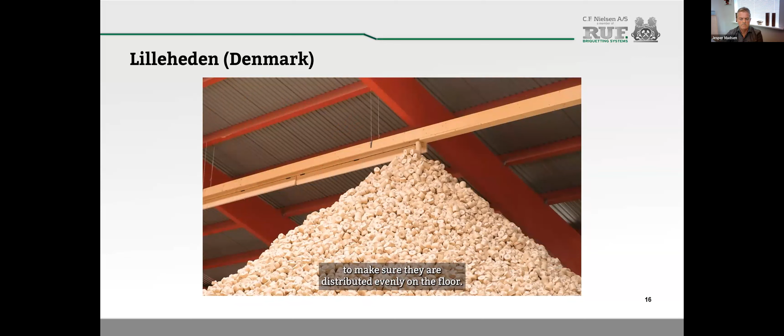When the compressed briquettes leave the press, they're hot and need to be cooled down, which is done in the cooling lines. At Lilleheden, the briquettes are transported outside through 20 meters of covered cooling lines into a storage building. Inside the storage building, the briquettes are split in 3 directions to make sure they're distributed evenly on the floor. This is where the briquettes are stored for later use.

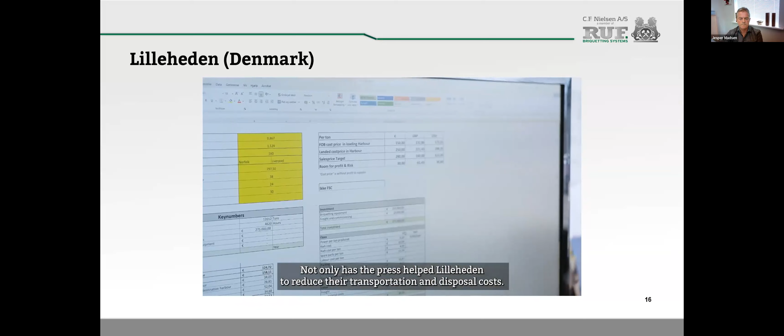Once the briquettes are needed for heating, they are transported to the industrial boiler for burning. Not only has the press helped Lilleheden reduce their transportation and disposal costs, they no longer have to spend time and resources on selling residues in the summertime and buying forest wood chips in the wintertime. And last but not least, the company has had many requests from other district heating plants interested in buying their briquettes.

That was another case story from Denmark, and that's quite unusual. We have never made this type in Denmark earlier, but within this last year, because of the crisis in Ukraine and the gas prices and energy prices going up, these products certainly got a boost, and now it's on the move. We can see that generally a lot of companies with this kind of waste, which they earlier considered to be waste, are now looking into doing it a little differently, not only for getting more fuel for heating, but also to reduce the amount of CO2 for transportation.

In this case, both of these companies are using a lot of trucks to take away this shavings and dust during half a year.

Now they can keep it all in-house and use it to benefit a lot of people in the surrounding. So that was a couple of cases from the briquetting side.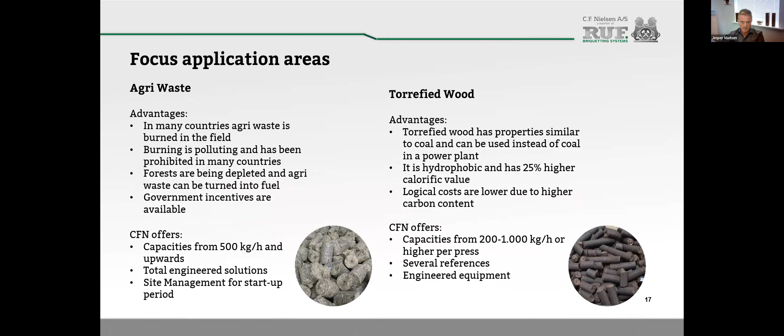Just to go through the focus areas where we're into now: of course agri waste - a lot of waste everywhere from the agricultural industry, and a lot of it's just been burned in the field. We have torrefied wood, which is a new segment we're going into. We've just gotten an order for a large torrefied wood installation in Finland, which is going to be made within the next year. Quite exciting.

Charcoal for consumer, which is also a leg we're working on, and industrial biocoal - this whole industry about trying to get something that could replace coal as firing for power plants and for cement industries is really something we can feel is booming now. So we are into a lot of projects where the output is going to be one of these four types of waste material handling, which I just showed you.

I told you our other business is to use briquette straw to speed up biogas. We have a different company called Kinetic Biofuel that can offer a complete concept for handling of straw from bales to briquettes, and then be put into the biogas production as feedstock.

Kinetic Biofuel is a partnership of two companies, C.F. Nielsen, where I come from, and Biofuel Technology, and we have the patent. The patent consists of the principle of using straw through a briquette press and then using these briquettes into a biogas plant. That's our patent, and no one else in the world is allowed to do that.

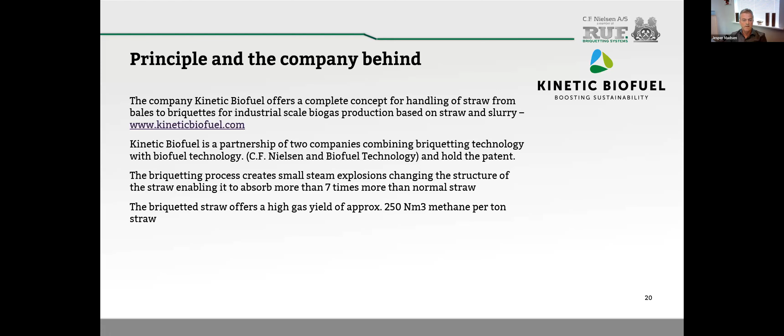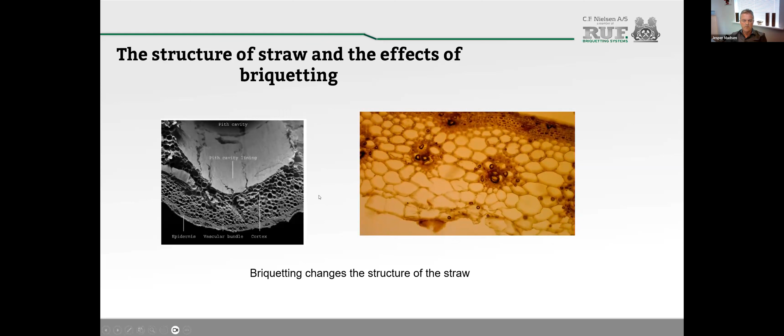And that's the patent we have, that actually uses this principle of a steam explosion of the straw. The press design for this - the biggest one we have is the 75, which has a capacity up to...

You're muted. You're muted. You're still muted. Yes, but we cannot hear you. Okay, let's try with the headset. Still muted. Okay, what now? Now we hear you. Okay, I'll try to go into the presentation one more time.

Fine. And go to where we ended, which was, I think, around here. Okay. We'll try again.

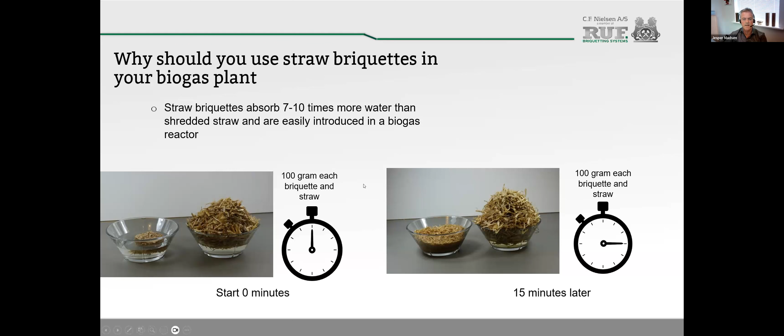The amount of water absorbed by briquette straw is 7 to 10 times higher than shredded straw. Another issue in a lot of countries in Europe, especially Germany, is that you're not allowed to use corn silage, for instance, as feedstock, because it's considered first generation raw material, whereas briquettes from wheat or straw from wheat, barley, or corn are considered second generation raw material, meaning a waste. So we intend to use this waste and make it into something valuable.

By putting straw briquettes into biogas production, you can have a yield of approximately 300 liter methane, corresponding to 250 liter methane per ton straw. You could also have a lot more briquette on a truck when you briquette it, instead of having bales on the truck, which is a logistical and CO2 footprint advantage.

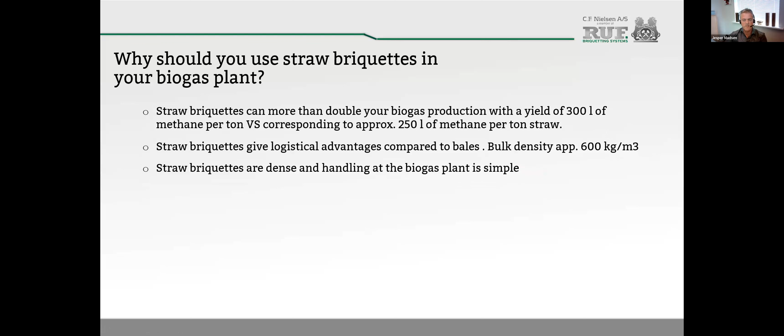Straw briquettes are dense, and the handling in the biogas plant is quite simple. So if you feed a biogas plant with briquettes, it's much easier to run, because the material you feed in is very consistent.

As I said, this concept is patented and proven through tests at the University of Aarhus in Denmark for many years. There's a lot of straw available everywhere, and a lot of this is just considered to be waste.

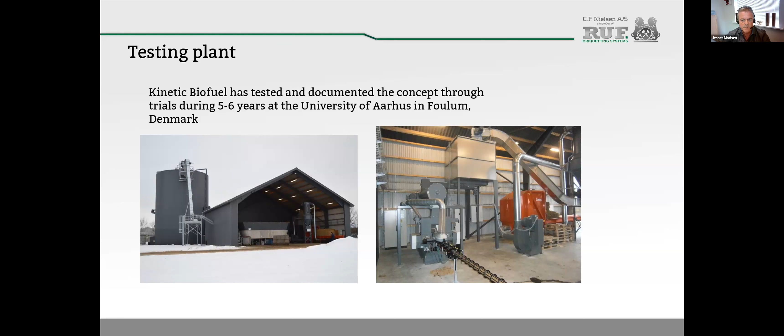We've been testing this for 5 to 6 years at a university in Foulum, where we've made a lot of tests and documented all these results of exceeding the biogas yield per ton straw. So if you're interested, I can send you a lot of these test reports. And we also have briquette presses or total plants running.

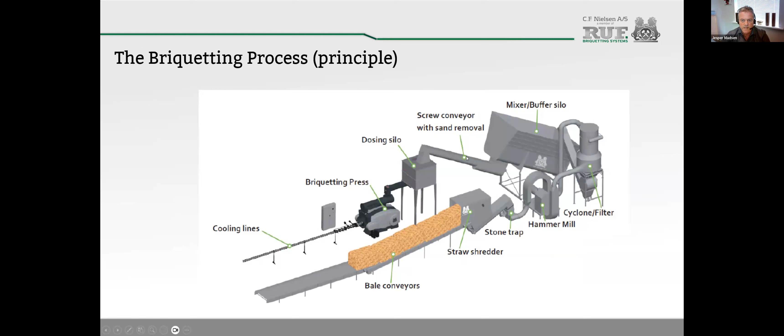This is how a typical setup would be. You have the bale coming in, going to a shredder, stone trap, hammer mill, cyclone filter, big mixer or buffer silo, through a screw conveyor with sand removal into it, dosing silo, and then to the press, and you have briquette coming out here.

These briquettes are mixed in a mixer together with some other raw material they have. It could be slaughtery waste, or from other kinds of industry where they have some agriculture waste they want to use, and then into the biogas plant. They get a rather high amount of gas compared to when you use normal wheat straw or barley straw.

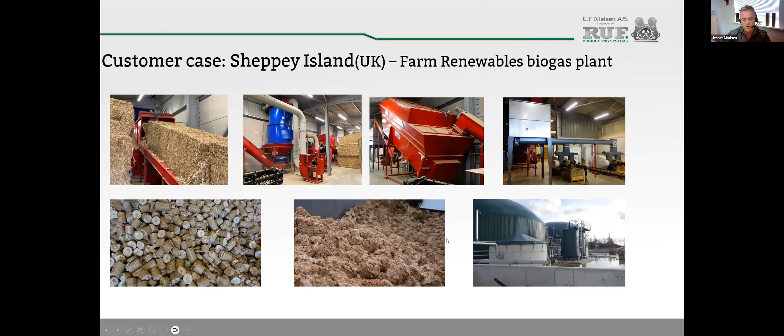Another big one is coming up in Denmark now. It's a really huge project in Vordingborg, in the south of Denmark, where they need 500,000 tons of briquette straw to be put into this plant. The investment is most likely being done within a month from now. The feedstock is biomass - briquette straw and some renewable energy from windmills, wastewater - and the output is going to be biomethane, about 150 million normal cubic meters per year.

CO2 is going to be a product coming together with the methane, which is basically free. So the intention is to build a factory next to this one, where they can take this CO2 and use it together with electricity and water to make jet fuel or other fuel for whatever industry needs it, and then some fertilizer. This area is really booming now in Denmark.

The reason we're interested in this is that we want to supply a lot of these satellite briquette production sites, roughly about 60,000 tons of briquettes per year, consisting of 4 presses and the whole preparation line and stock. As Christian mentioned earlier, or Martin did, it's essential that these production sites are close to where the straw is.